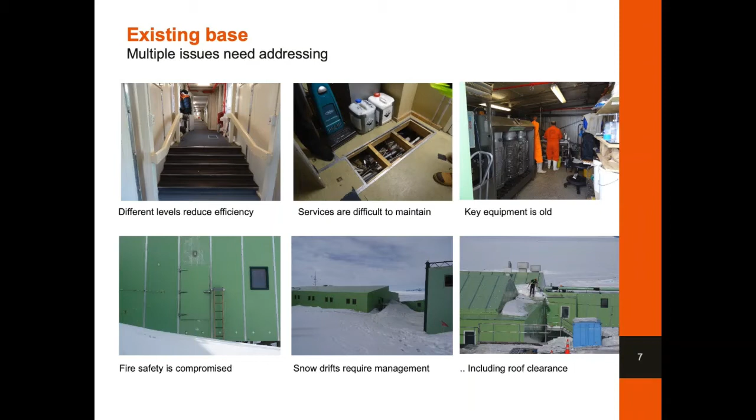In 2017, we formed a project team to deliver the Scott Base Redevelopment Project. Due to the requirement of specialist polar experts, the team comes from all around the world. We also work closely with other national Antarctic programs to share information and learn from each other.

We are approaching the final stage of design, which is called detailed design. It's a very exciting and important stage where we confirm the details and ensure the design is fit for purpose, meets the project budget, and is able to be constructed in Antarctica. I'm going to hand over to Hugh to discuss the design and its evolution now.

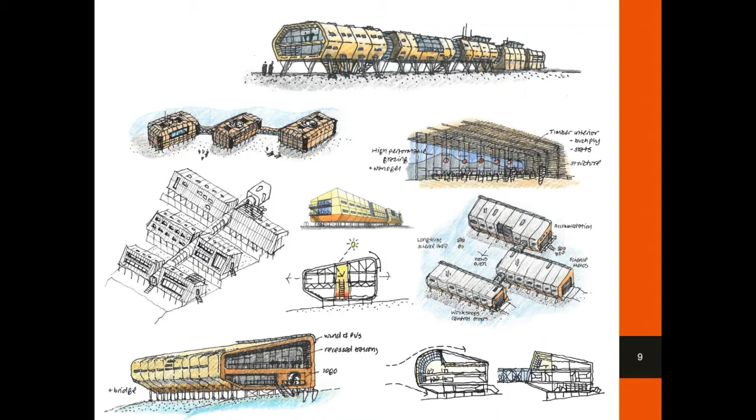In 2017, we began developing designs for a new Scott Base. These sketches show some of our initial ideas. Over time, one idea emerged as the optimum solution.

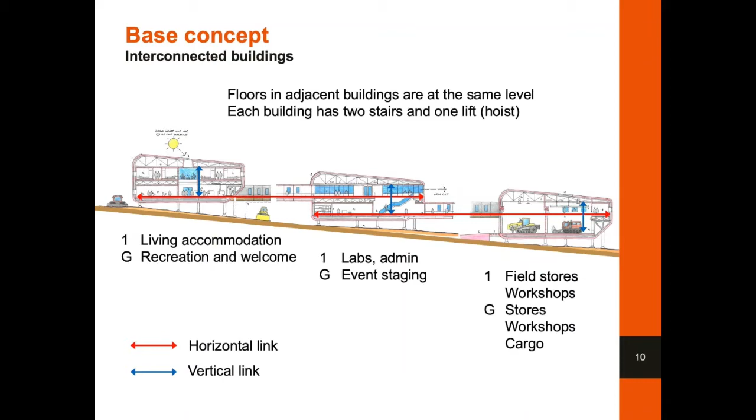The concept was simple: 3 buildings of matching width and shape step down the hill of Pram Point. The buildings are connected by link bridges. In this way, the lower level of the top building connects to the upper level of the middle building, and the lower level of the middle building connects to the upper level of the lower building.

The middle building contains science staging areas, labs, offices and administration functions. The lower building contains engineering workshops and warehousing. Plant is distributed through the buildings in an arrangement which maximizes resilience.

The layout has been developed to minimize environmental impact. Despite being located in Antarctica, there are a surprising number of factors which have impacted on the location of the buildings, from the position of the road from McMurdo to the coastline, the location of long-term science instruments, rare flora which grows on the hillside, and the overall irregular sloping topography of the site.

We're still working on the optimization of the site layout to minimize the amount of disturbance to the ground. The design will provide linked, communal and collaborative space to support people's well-being and help them to feel culturally connected both to Antarctica and to New Zealand.

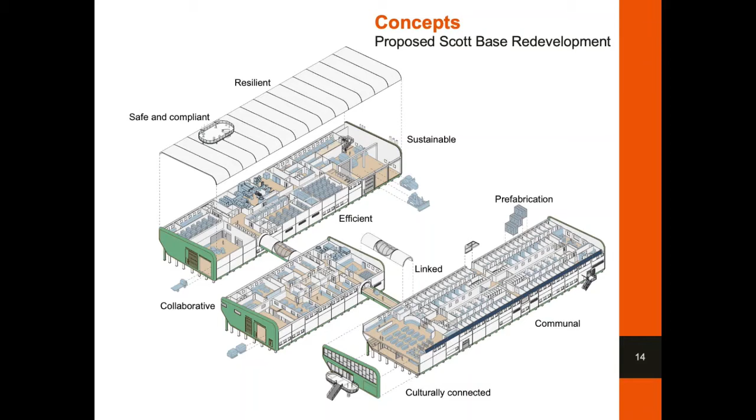It will be efficient, safe to operate, resilient and highly sustainable, making best use of wind energy to reduce the use of fossil fuels, and above all, it will provide excellent facilities to support world-class science. Each of the buildings has the same cross-section.

They are steel-framed. Zones have been created to facilitate service distribution and ease maintenance. The buildings have monopitch roofs and a chamfered leading edge to reduce wind drag.

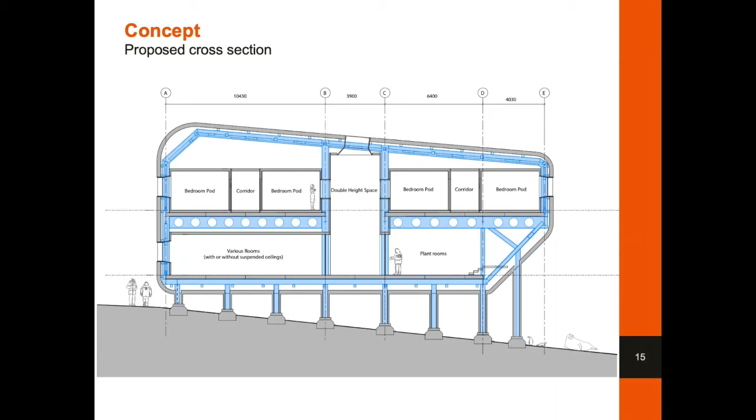They are also elevated on legs at least 1 metre above the ground, so that the wind accelerates underneath, preventing snow from accumulating under the buildings or in their immediate vicinity.

This concept was tested in a laboratory in Canada. Models of the existing base and the proposals were placed in a flume of water. A current was created within the water and then fine sand was introduced. This simulated the snow and ice which are blown across the sea ice from the southwest.

As the sand passes over the buildings, it drops out of the current in the same way that snow drifts around buildings. We modelled the existing base so that we could benchmark the process and make sure it properly represents what happens at Scott Base.

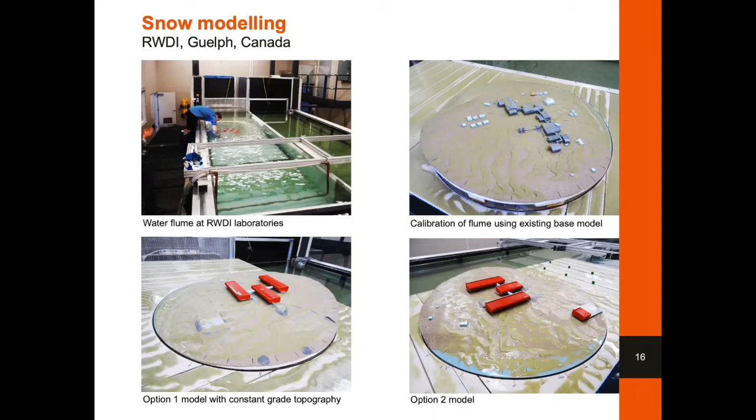We then tried different permutations of the designs to arrive at the optimum arrangement of buildings to minimise drift and therefore snow management. The design fuses pragmatism with a desire to create a home from home for the residents and a building which captures the spirit of New Zealand.

The entrance is welcoming with views into the building. On entering Building A, visitors will be welcomed in a dedicated lounge where they will receive their induction in a pleasant space lined in timber and with views out into the landscape.

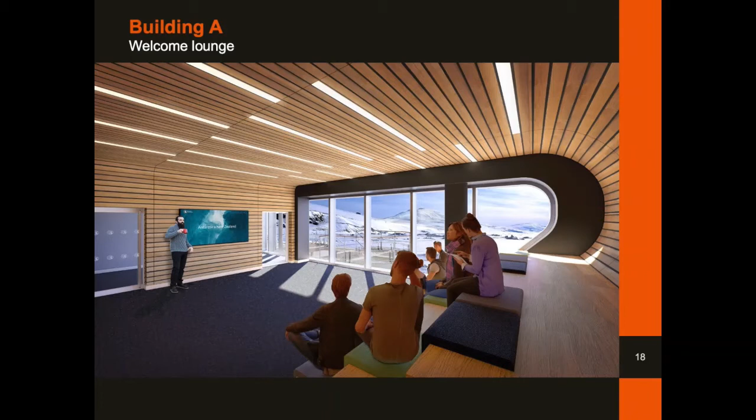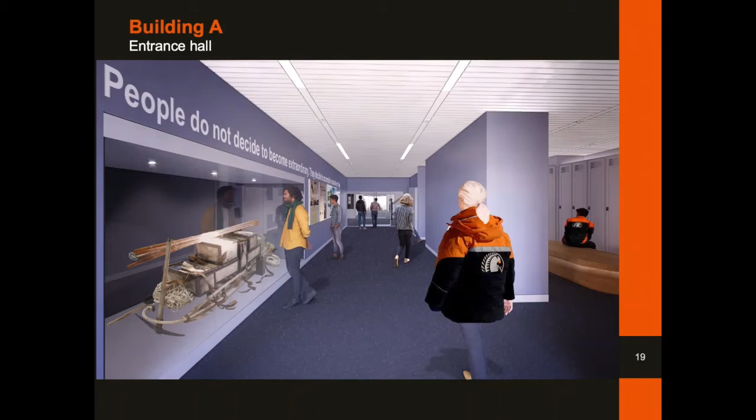The main entrance corridor will include displays to explain the history of Scott Base, of New Zealand's expeditionary endeavours in Antarctica, and of the great explorers who first visited Ross Island over 100 years ago.

The dining room and bar upstairs have fantastic views through a panoramic window to the pressure ridges of the Ross Ice Shelf and Mount Erebus, the iconic volcano on Ross Island.

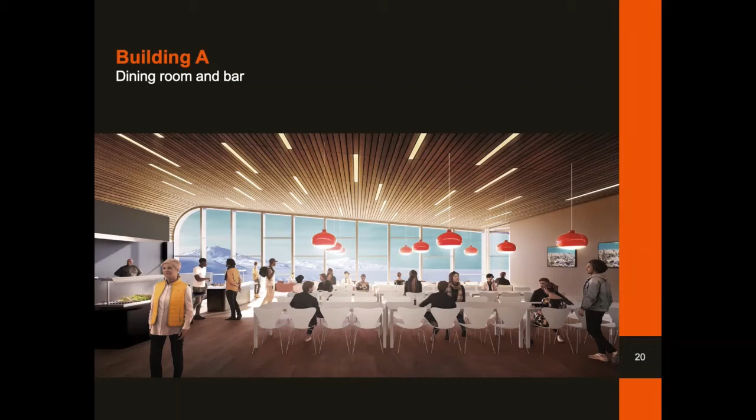At the far end of the accommodation building, there is a library with views to Mount Discovery.

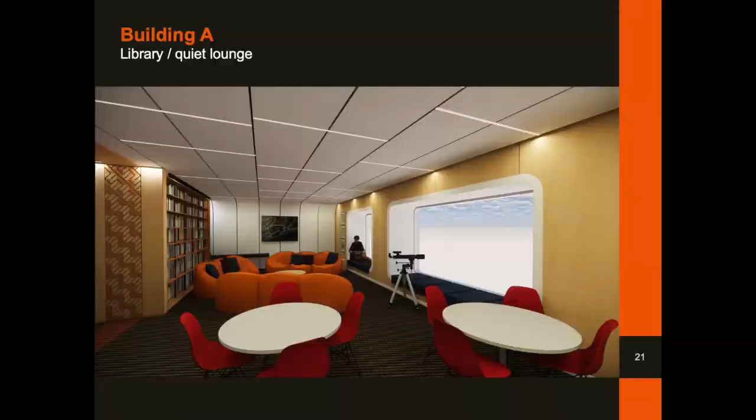Wherever possible, we have considered the experience of living at Scott Base and ways to make life as comfortable as possible for the residents. Longer-term residents will have a single bedroom with views into the landscape.

Each bedroom includes plenty of storage space, blackout blinds, lighting to support circadian rhythms, a desk or comfy chair and places to pin up pictures.

Shorter-term visitors will be accommodated in twin or pod-style rooms. Great emphasis has been placed on the acoustic comfort of the residence, which has been designed using a laboratory process to simulate the likely level of noise transmission from one space to another to ensure maximum privacy.

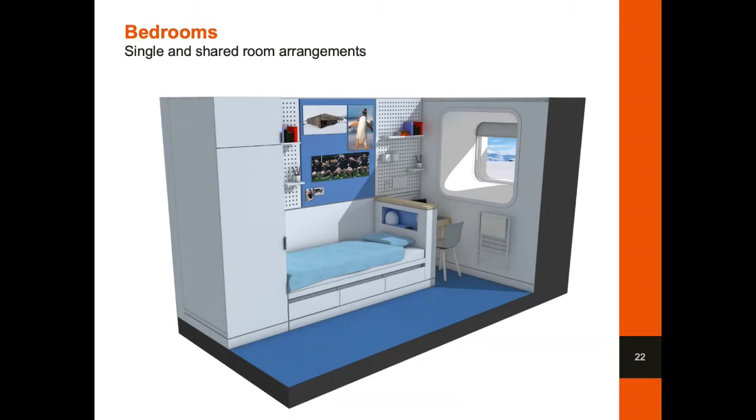Building B is dedicated to science activities. A large science cargo handling area allows expeditions to gather their equipment together before heading into the field. Cleaner workspaces along the edge allow scientists to prepare electronics or calibrate equipment.

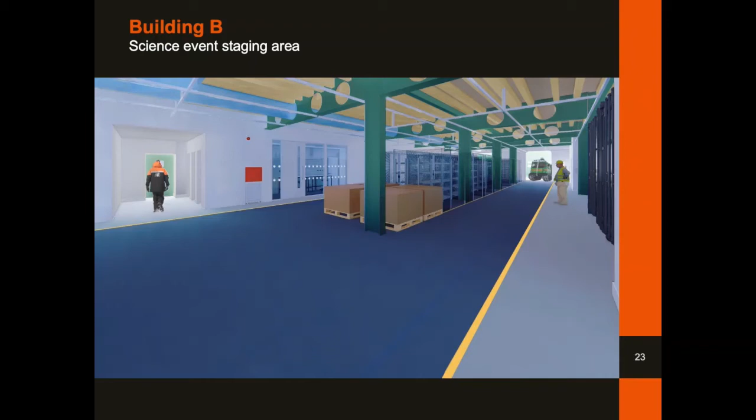Upstairs, there are offices for managers, field operatives and visitors, as well as training rooms, meeting spaces, tea points, a printing station and the main comms room.

The offices are as open plan as possible to foster collaboration. There are also a series of labs, shown behind the glass screen on the right, with suitable services to support as many scientific activities as possible.

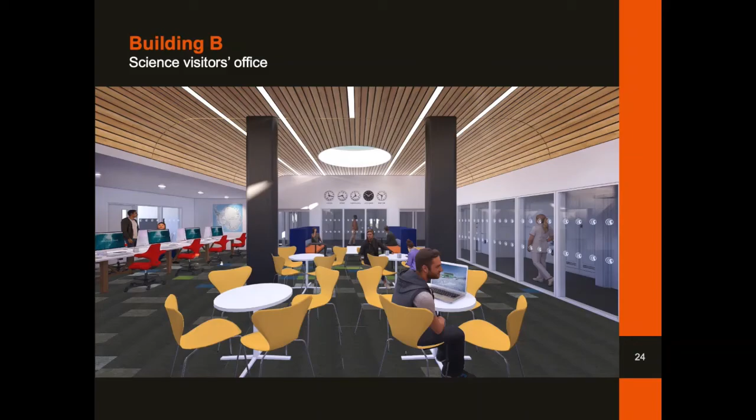The third of the three interconnected buildings contains workshops and warehousing. It also houses some of the main plant spaces, including the wastewater treatment plant. Generators, boilers and water production are split between this building and the accommodation building to maximise the resilience of the base.

The cladding combines metal composite panels to the main body of the buildings with composite glass fibre panels to the areas with more complex geometries, which need to be curved to minimise the impact of the wind on the structure and snow deposition.

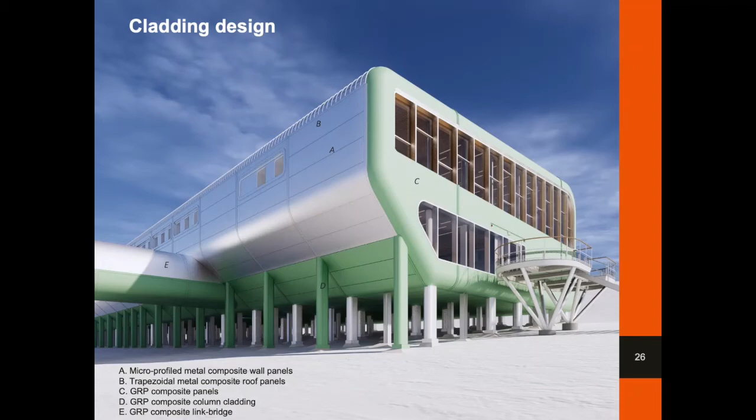The structure is made of steel, designed to the same standards as a public hospital in New Zealand. It is simple in principle, utilising a regular, repeatable frame.

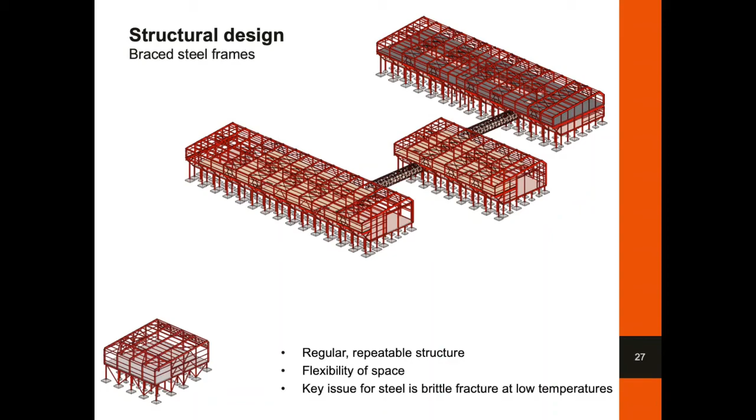The structure must be able to withstand transport loads as well as dynamic and static loads once constructed. We investigated many ways in which the new base could be built. These ranged from prefabricated components transported in shipping containers through to moving whole buildings in one go.

We are currently proposing to build the base in New Zealand and transport it to Antarctica in large modular sections using specialist equipment.

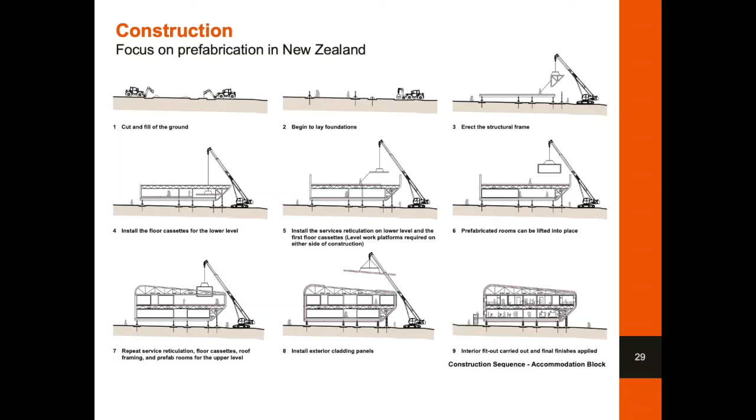The proposed vessel for moving the large modular sections is a polar-rated PC-class vessel. The modules would be moved using self-propelled modular transporters.

This method has been used extensively in industrial projects and proven in the Arctic environment.